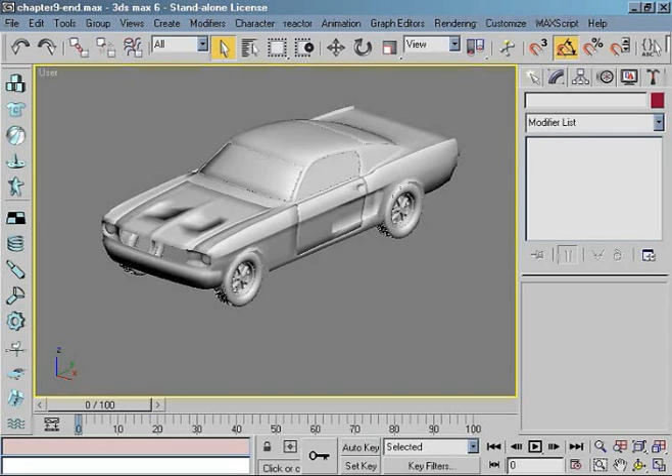Welcome back, my friends. As you can see, I merged our wheel we made in the previous chapters to the car scene, positioned it, and then copied it. So now our vehicle looks much better.

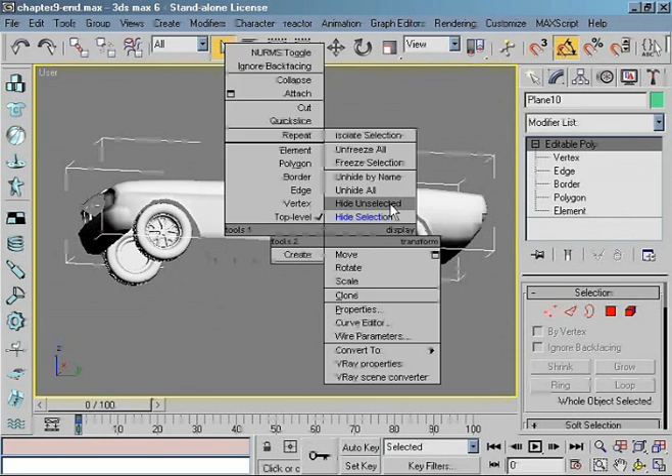Now it's time for the chassis. Creating it, I always use the body elements that are connected to it, so in our case it will be only the main body object, so I only keep this element in the scene. First I will select the outlining edges only on one side of the car, and then use them to create the chassis. Usually the car body is divided into a few elements like bumpers, doors, etc., so in that case first you have to create the chassis part from all those elements and then connect them.

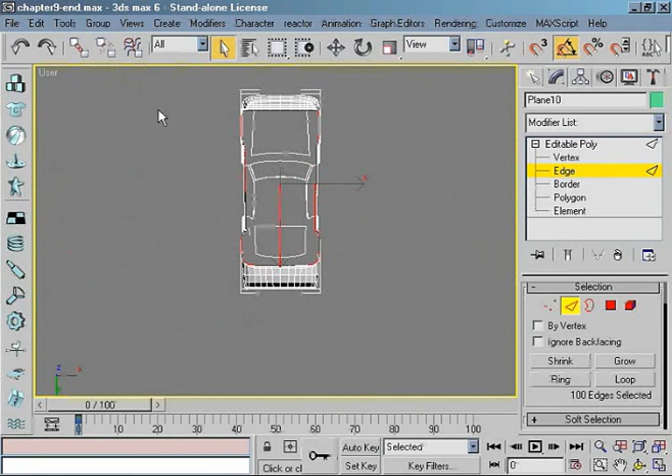Thanks to this, it will have already got the car body shape, so you'll save a lot of time because you won't have to fit it to the rest of the car body elements. At the end, we will have to fix one little bug in the chassis geometry, but I'll show you that later.

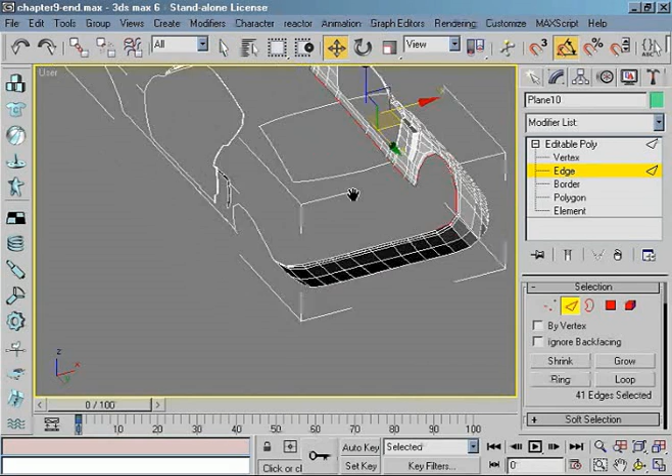Okay, I have got the correct edges selected, only on one side of the car, so now I can copy them. It does not matter where, we will position them later. After this, we have to detach the newly created polygons.

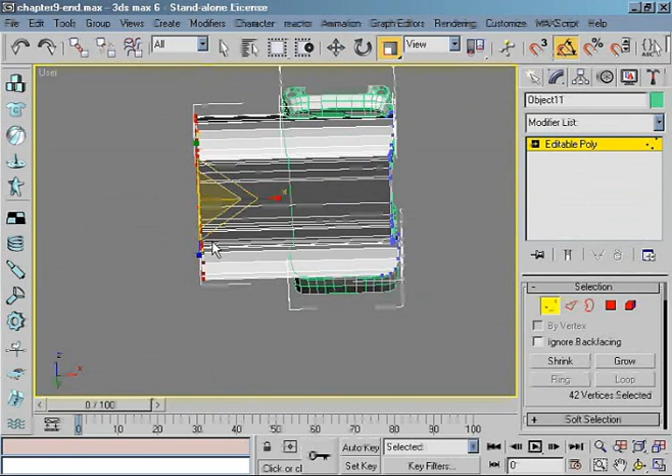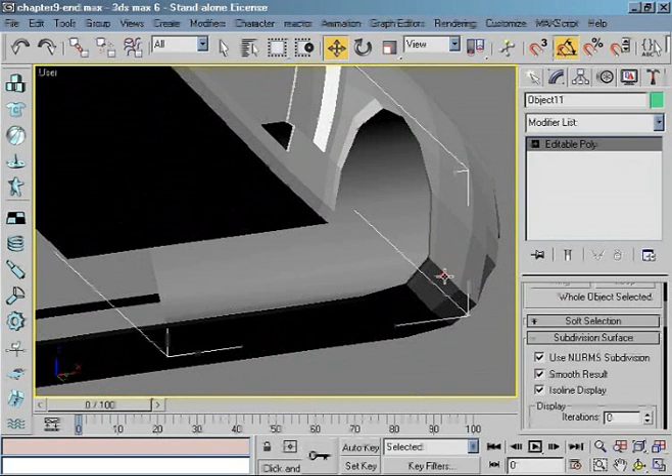Alright, now I can show you this little bug that I was talking about. As you can see, our chassis looks to be perfectly fitted to the car body, but when we turn the NURMS on, I forgot to turn the iterations on as well. When we set it to 2 on the car body, and the same on the chassis object, we will see it.

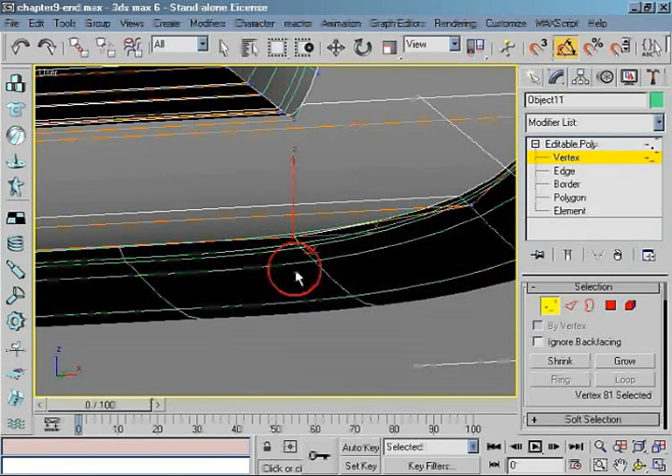After turning to wireframe, the chassis does not fit the body 100%, but we can simply fix it. We just have to chamfer some of the vertexes so we will create more smooth edges. Just look, maybe this will be better seen on the front part of the car.

Oh yeah, just look at this. We may have to chamfer this vertex a couple times so it will fit the body. Of course, if we want to make a smoother line, we have to create more new vertexes.

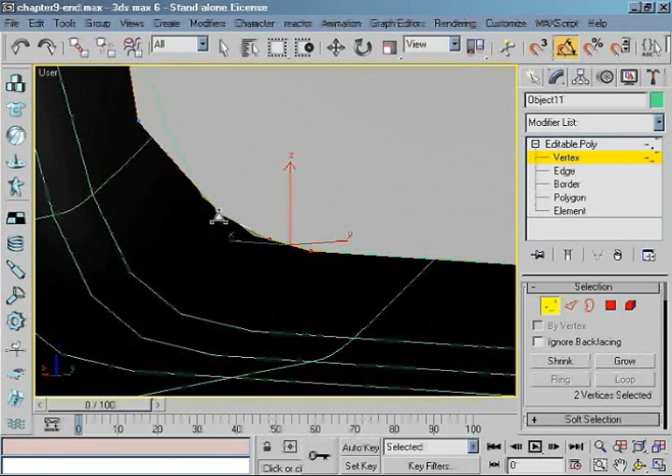I want to do this fast, so it will be a little imprecise, but from my experience, I know that this level of precision is usually good enough for 3D. Of course, when you want to make some close-ups of this area, you'll probably have to spend a little more time editing those vertexes.

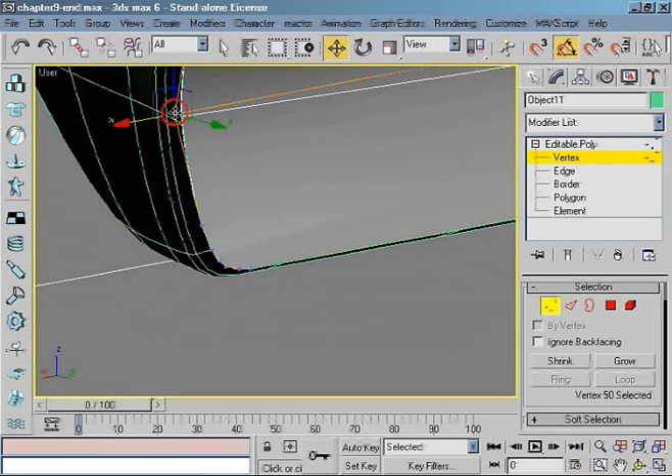Okay, maybe I'll move those last vertexes. Okay, that's all. Now the chassis fits the car body well. Well, that is almost all we have to do with the chassis.

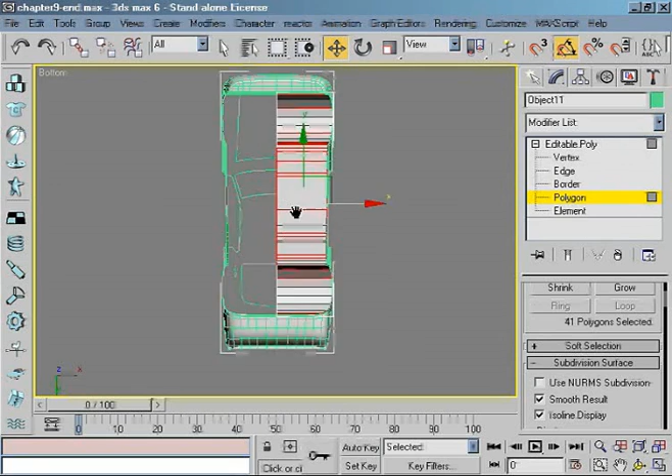Now, we just need to edit this object a little more because now there's an empty space behind the wheels. I will show you how to solve this problem, fast and easy.

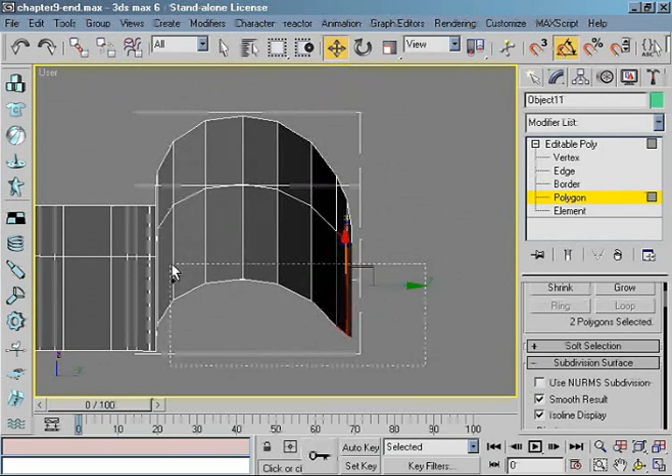After adding this new line, I can simply delete the polygons that would be behind the wheel and build a new part of the chassis. It will be very easy.

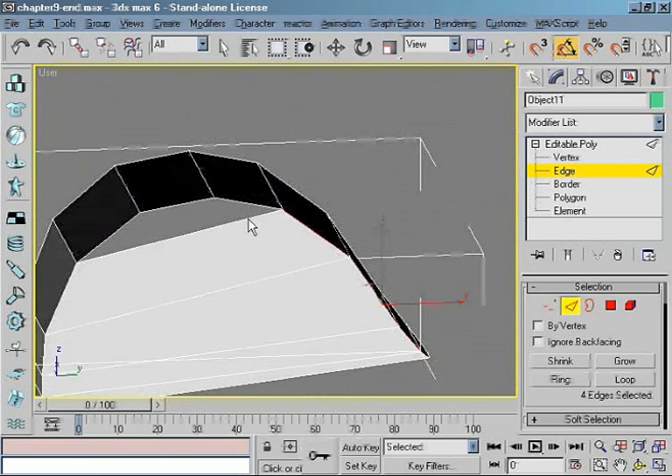We just need to copy these edges and then weld them to the edges on the other side. Thanks to this, we will reduce empty space so your render will be much more realistic, since there will be a chassis not only under the car, but under the wheels too.

Okay, now I just need to correct this hole.

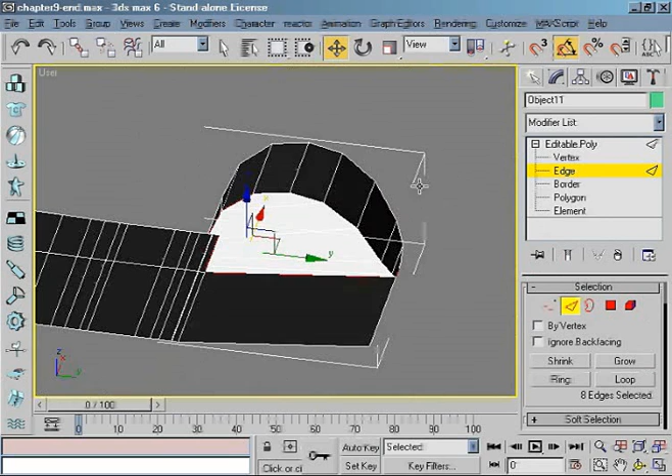The last thing I will make is creating sharper corners in NURMS subdivision mode. So I need to select all edges on the line of the newly created part, and I will chamfer them a little. I could use this method of smoothing groups too, but chamfering is a faster way.

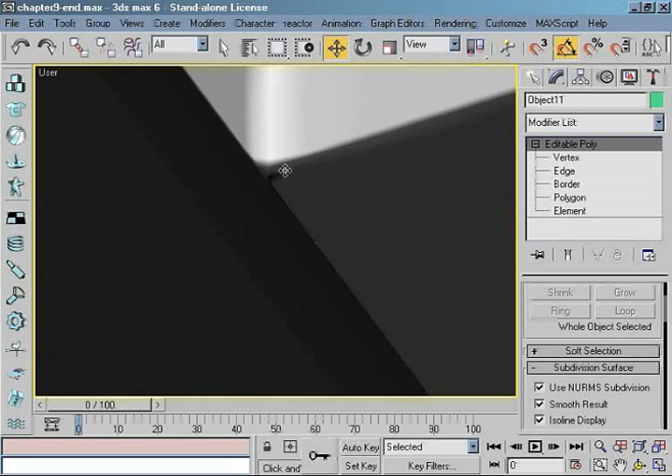As I can see, there's a little bug in the geometry. Just here. Well, I probably did not weld some vertex. Let's check it.

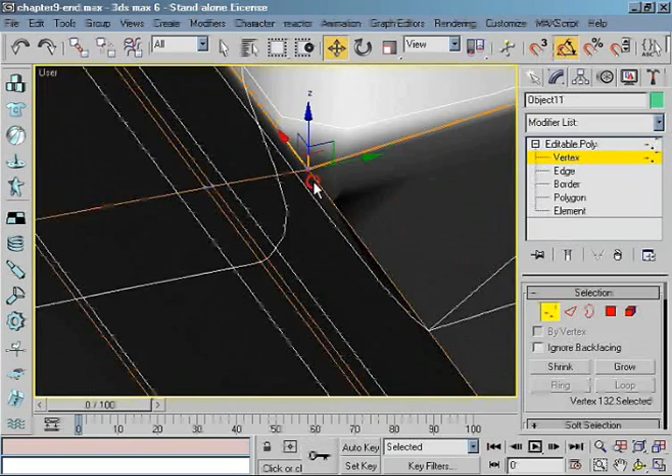Ah, I see them. A simple correction and everything should be okay now. Well, but it isn't. So there should be another unwelded vertex. Okay, after welding that, my chassis is correct.

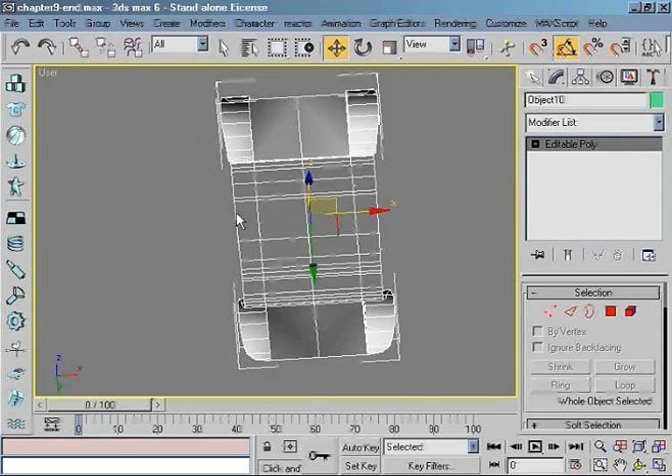So now we just need to do this the same with the front of the car. But I will save some time because this is exactly the same job. Here, you can see the final version of the chassis. As you can see, after editing the front wheels, I used the symmetry tool as always. Of course, this chassis isn't too detailed, but it works in most cases of car modeling.

That's going to conclude this chapter. In the next chapter, we will focus on details like the logo and wipers on the car. So, see you next chapter.